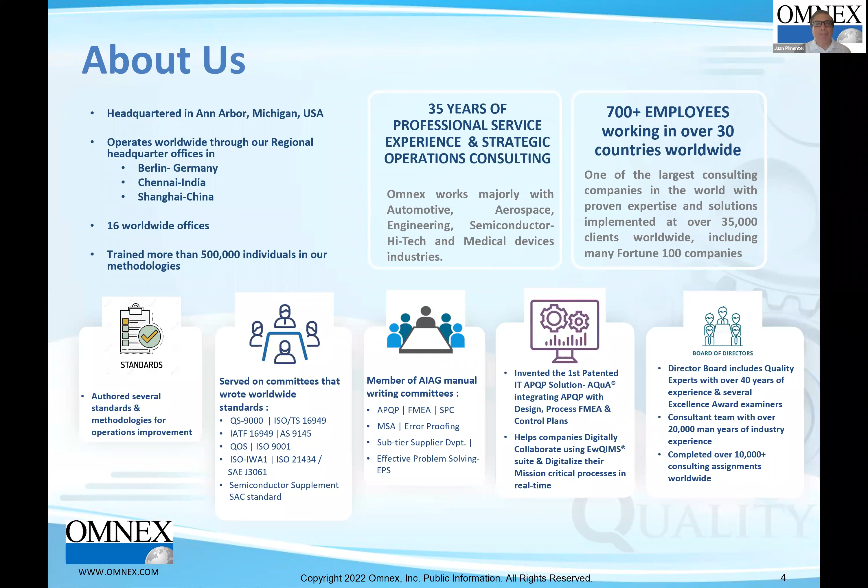Yeah, good morning. My name is Juan Pimentel, and I am pleased to offer you this seminar on a new standard that was just approved in April of this year, which is ISO 21448. You have probably seen some of these slides, which is an introduction to Omnex. So I'm not going to spend too much time on this. You will get a printed copy of this presentation that will include some of this information. As you can see here, Omnex targets several markets: automotive, aerospace, semiconductor, electric and autonomous vehicles, medical devices, and manufacturing. This webinar targets automotive.

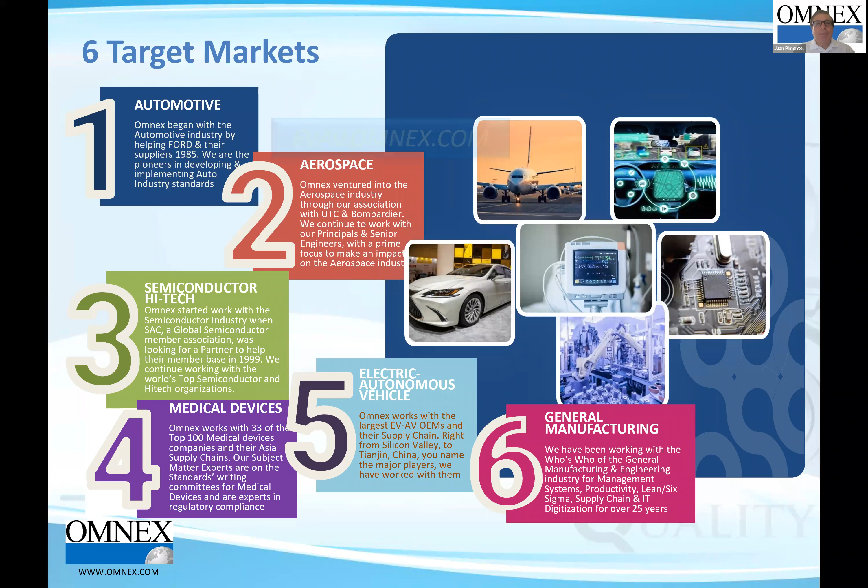A little bit about myself, as was mentioned before. I have an extensive background in functional safety as well as automotive. I used to be a professor at Kettering University in Flint, Michigan, and now I'm an international consultant.

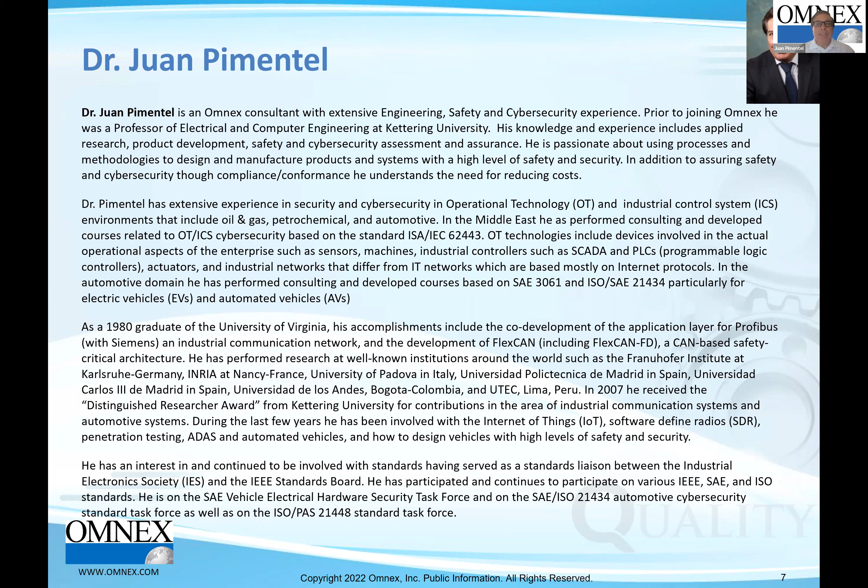This is the abstract of the webinar. Basically, what we're saying here is that NHTSA has published information about accidents, and it turns out that less than 1% of vehicle crashes are attributed to vehicle failures themselves. The rest are related to other reasons, including drivers, whether or not they're automated or manual. So this standard 21448 is very important because it promises to address the issue of these accidents.

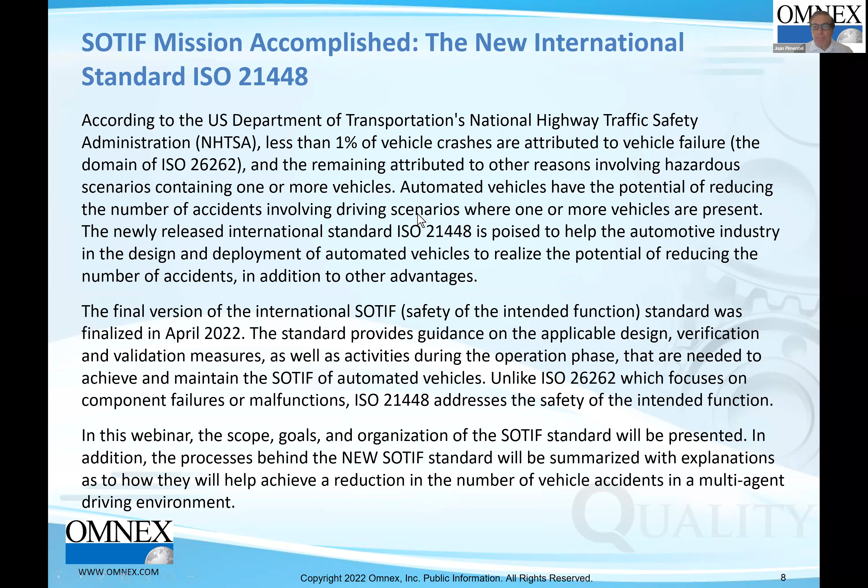So this is the contents. I will provide a brief introduction to some terminology, such as ADS, HAD, and ADAS. I will review very briefly the SAE automation levels, which is very important. And then I will move to the fundamentals of SOTIF, emphasizing the 4 areas, areas 1, 2, 3, and 4. Then I will cover an overview of the SOTIF standard and emphasize the main clauses and the annexes. At the end, I will provide an integrated implementation with SOTIF and functional safety, as well as an example, including adaptive cruise control.

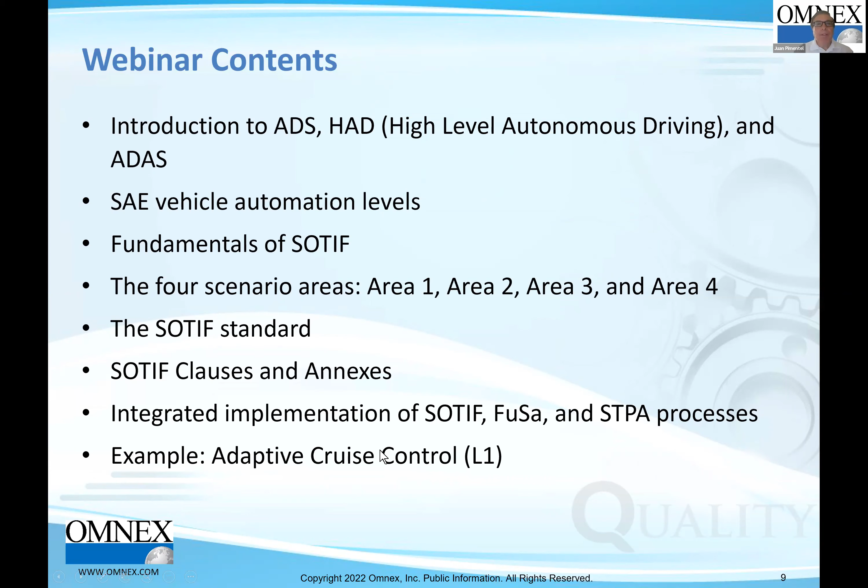All right, so there is some terminology related to autonomous driving, and there are basically 3: ADS, ADAS, and HAD. ADS is the umbrella term that includes automation levels 1, 2, 3, 4, and 5 of the SAE International Automation Level Standard. Now, as a subset of that, we have 2: HAD, which is high-level autonomous driving, covering 3, 4, and 5, and ADAS, which covers levels 1 and 2. So you could view ADS as being ADAS plus HAD.

That's one view. However, I must mention that some definitions actually say that ADS is equivalent to HAD. ADAS, however, is fairly well established, strictly 1 and 2. So you may find some definitions that are slightly different than this one. But nevertheless, in my opinion, the most important thing, whatever definition you use, is to find out what levels it covers.

Here are a few examples of ADS systems at levels 3 and 4 in this case. So examples get different names. For instance, traffic jam chauffeur systems, and mostly European terminology. In the US, it's traffic jam pilot. And likewise for the next one, motorway chauffeur system or highway pilot, urban chauffeur system or urban pilot, and automated valet parking systems, also called car park pilot.

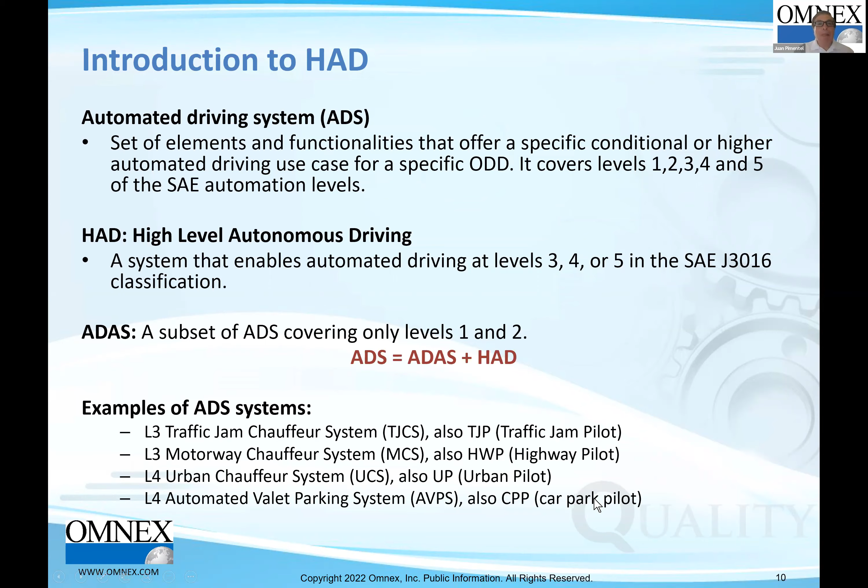So as you could see, these are automated systems for a variety of uses. For instance, traffic jam, traveling on the highway, in a city, or in a parking lot. Just as a brief background, here we're showing a lot of stuff primarily related to sensors and controllers in the car, as well as communication systems. So we're particularly concerned about environmental perception sensors because those are very critical for SOTIF.

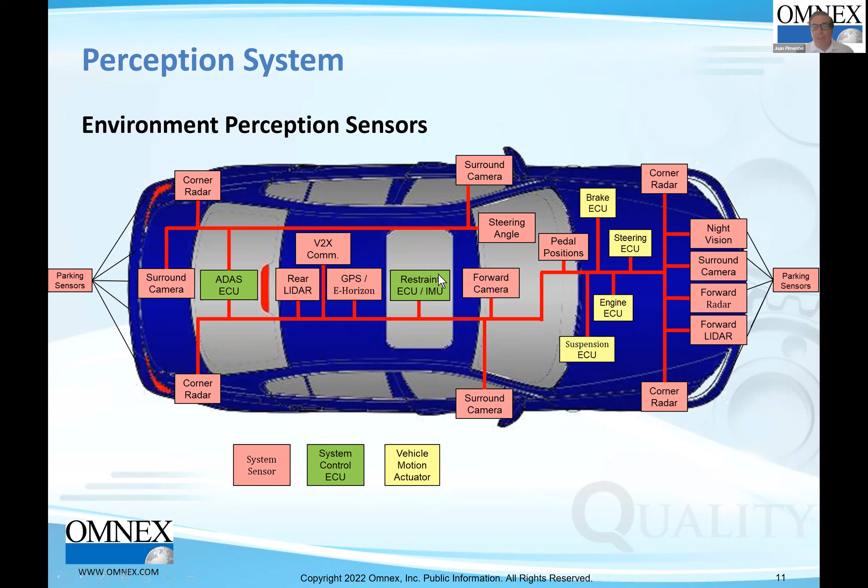And as you could see here on the right side, you have parking sensors, you have radars, you have cameras of various types, and you can also see in this diagram some controllers, which are the ECU portion. So the ECUs are controllers, and then we have some other type of information, which is called perception sensors. In yellow, we also have some motion actuators, and in green, we have the actual controllers. So this is to illustrate the type of elements, if you will, or hardware and software in a car that is directly related to ADAS and the automated systems.

Also, the standard uses a model called the Sense Plan Act model. And the idea is that the first thing that happens is that you sense the environment, through sensors, obviously. Once you have a pretty good idea about the environment, then you go into what is called planning and control. So this middle portion has to do with control functions and planning functions. Once you have that, then on the right side, you have the actuators. So this is where the controls get actually implemented in the car and make the car move in certain ways.

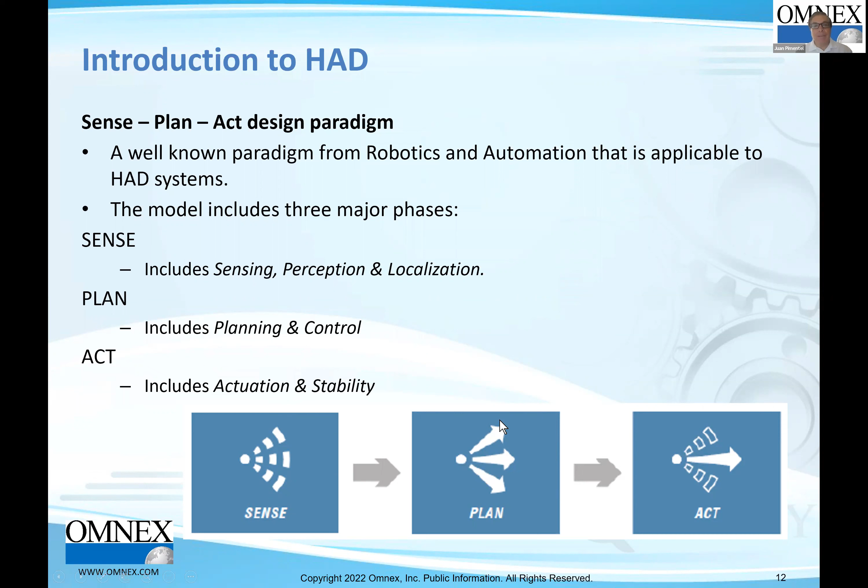Other terminology that really comes from the SAE side is the DDT, or dynamic driving task, which you could think of as really all of the activities or actions that need to happen in order to operate a vehicle. So you as a driver, whether you realize it or not, actually do all of these things. The main difference in automation is that we're going to have a computer, sometimes called robot, to perform these functions, either totally separate from the driver or in conjunction with the driver.

So the main functions, as you could see, are lateral motion, which means steering, and longitudinal, which means braking or acceleration. However, there are other activities, like monitoring the environment. Another one is to detect and also respond to objects and other events in the environment. Still another one will be enhancing conspicuity via lighting, signaling, or gesturing. In other words, you're changing the environment.

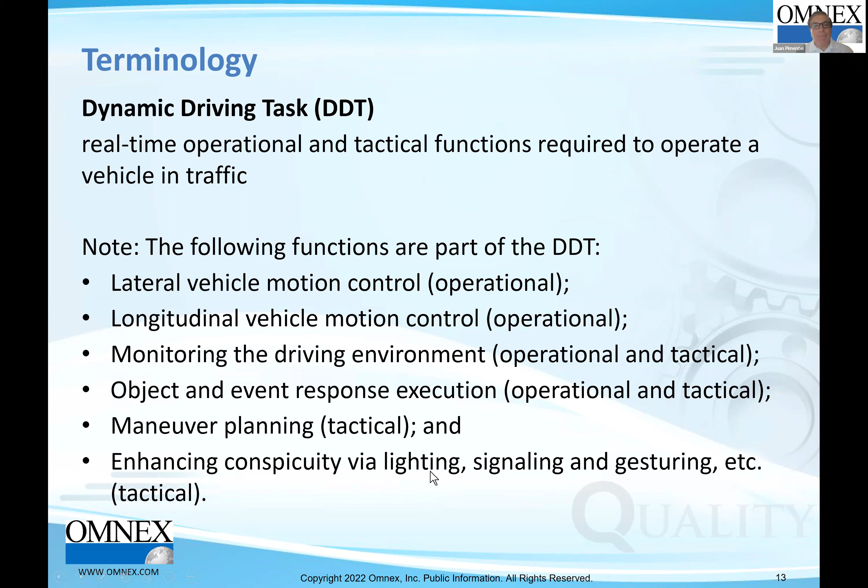Another terminology that's used very much, very important, is called ODD, Operational Design Domain. The idea is that it is really very difficult to design an automated vehicle to work in every situation, every condition. The design is going to be gradual, starting from a very simple ODD, and then expanding or extending the ODD to cover many situations. So as you could see, these are conditions under which a given driving automation system is designed to function.

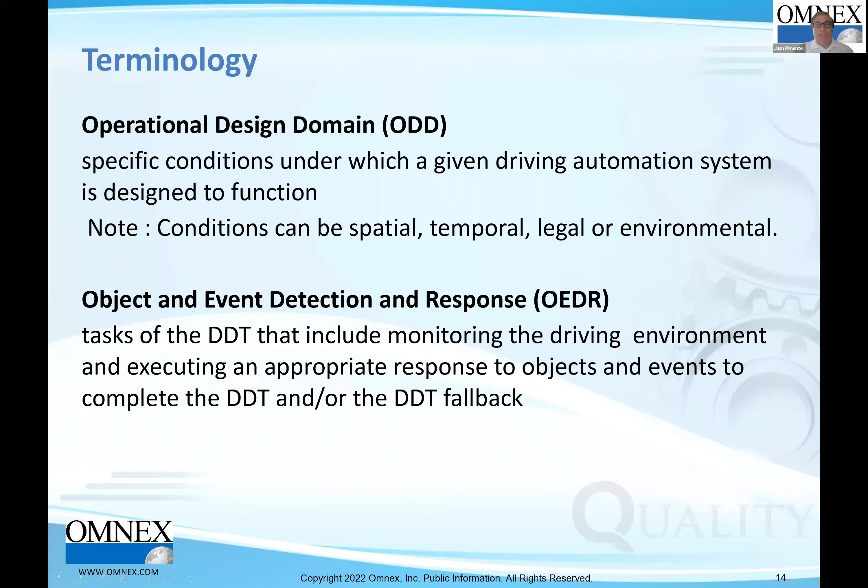The other term that I mentioned briefly earlier is OEDR, which is the Object and Event Detection and Response. So really two things here. One is the object, and the other one is the events. You need to detect them and you need to have a response to them. All of this will be useful actually when we talk about the classification of the automation levels.

This is a diagram that shows hierarchically how all of these terms are combined. The DDT, again, determines the conditions under which the system works. And as you could see, the OEDR is very active here because the OEDR is about detecting objects and also detecting events. And then the R stands for response, which means that you have to do something. And the things that you can do, as you could see here, are lateral vehicle motion control and longitudinal, and also the very basic motion control of the car itself. This translates basically into steering, braking, or accelerating the car.

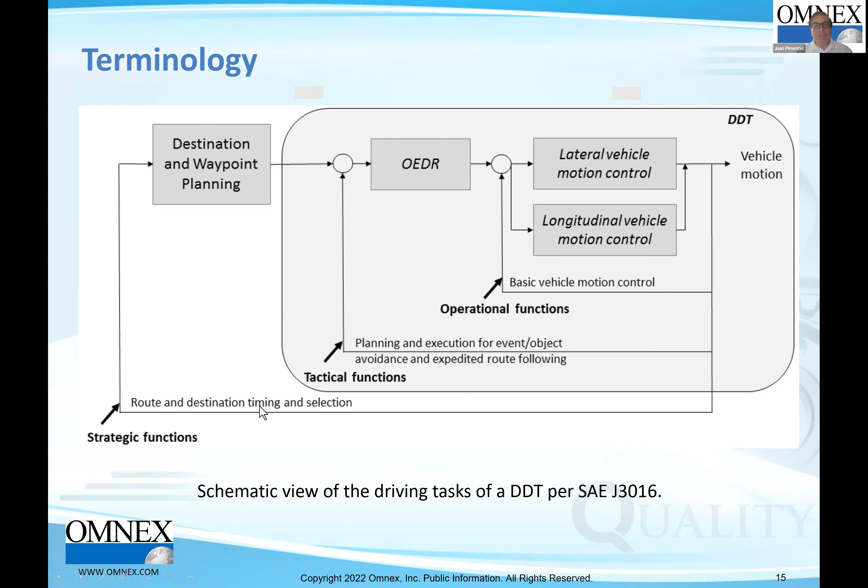Secondly, this diagram introduces three particular types of functions: operational functions in the inner section, the tactical functions in the middle, and then you have the strategic functions. And by the way, this document, SAE J3016, only deals with the operational and tactical, not the strategic. However, SOTIF deals with the whole thing.

This diagram explains the automation levels that I talked about before. There are 6 of them altogether, including no automation. So no automation means the old days, maybe 30, 40, 50 years ago, where the driver did everything, of course. And then you have level 1 and 2, where the driver, as you could see, plays a significant role.

And then 3, 4, and 5, where the human driver plays a less significant role. So there is a big difference between levels 1 and 2 as compared to 3, 4, and 5, okay? Because 1 and 2 is basically ADAS that we talked about, and 3, 4, and 5 are high levels of automation. And very important, a lot of people get confused, especially in the middle portion.

So the left one here is steering and acceleration, which means who does that? In the middle is monitoring the environment at all times, okay? And then the fallback, which means that when the automation fails, who takes over the system?

Let's take a good example, for instance, at level 2 and 3, because these two are very confusing to a lot of people. For example, it is well known that Tesla is a level 2 system. And this is why if you read or know a lot about Tesla, you will see that the driver here in the middle is responsible for monitoring the environment, okay?

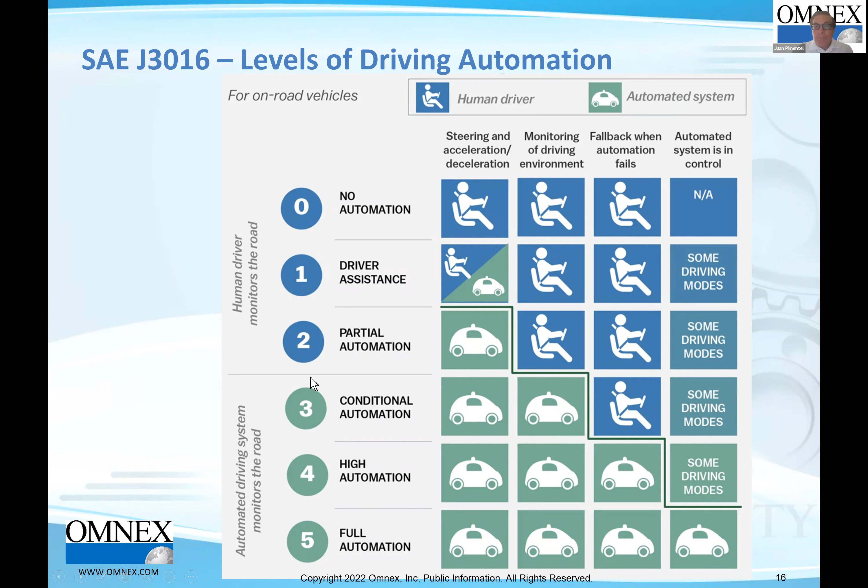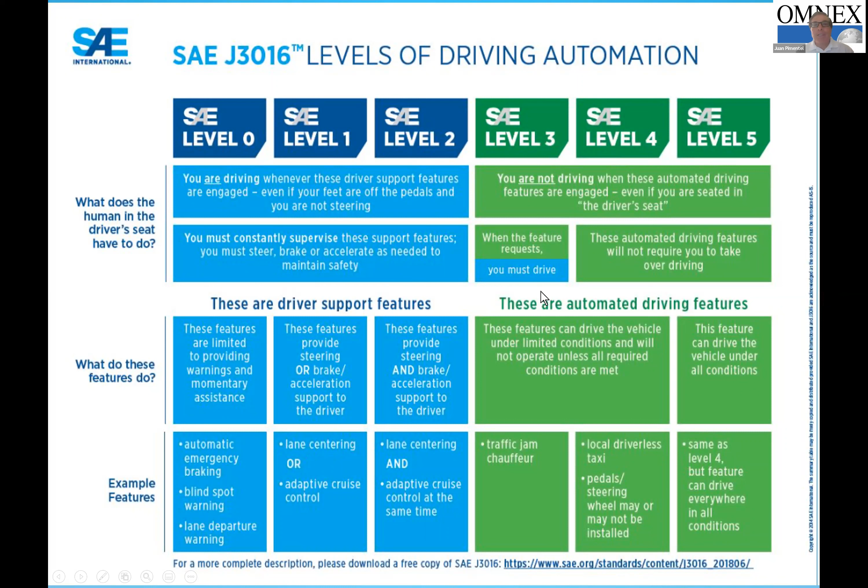And this is another diagram from a different context to illustrate the prior diagram, emphasizing the role of the human on the top, and at the bottom, what the main responsibilities are. So these are different views of the same automation levels that we talked about earlier. I'm not going to spend too much time on this one because this is complementary information.

Okay, so let's move to the actual SOTIF, and I'm going to start off with the fundamentals and then move to the standard itself, okay? Sorry about that, I think I went backwards. SOTIF, first of all, stands for the safety of the intended functionality. And sometimes there's a confusion between this standard and a prior standard also about safety, which is 26262, called the functional safety standard.

And the reason for the confusion is that both standards use the term function or functional a lot. However, the main difference is that 26262, functional safety, has to do with hazards due to malfunctioning behavior of EE systems. EE means electronic and electrical, by the way.

Another way to explain this is that, as you know, cars today have a lot of electronics, a lot of technology, brought in for many reasons. I'm not going to go into that, but you must accept the fact that it's a very sophisticated system and has a lot of electrical, electronic, hardware, software, sensors, you name it, right?

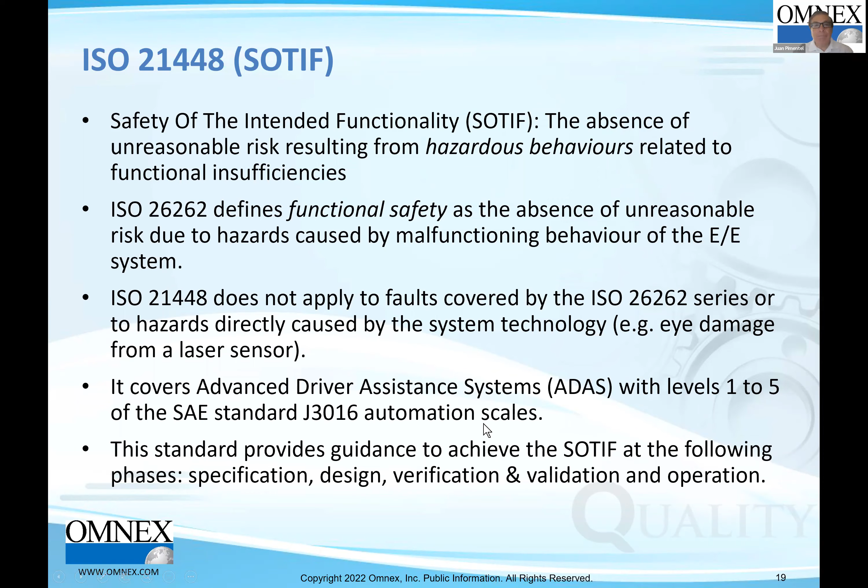So first of all, you have a triggering condition that will trigger a hazardous behavior, and that results in a hazard. So you have the hazard due to SOTIF type of causes that I mentioned before, functional insufficiencies. But in this case, you need a triggering condition to trigger all of that. The triggering condition works together with the scenario containing those conditions in which the hazard can lead to a harm. I will give you some examples later on because these concepts are sometimes a little bit abstract. I'm talking about triggering conditions versus functional insufficiencies.

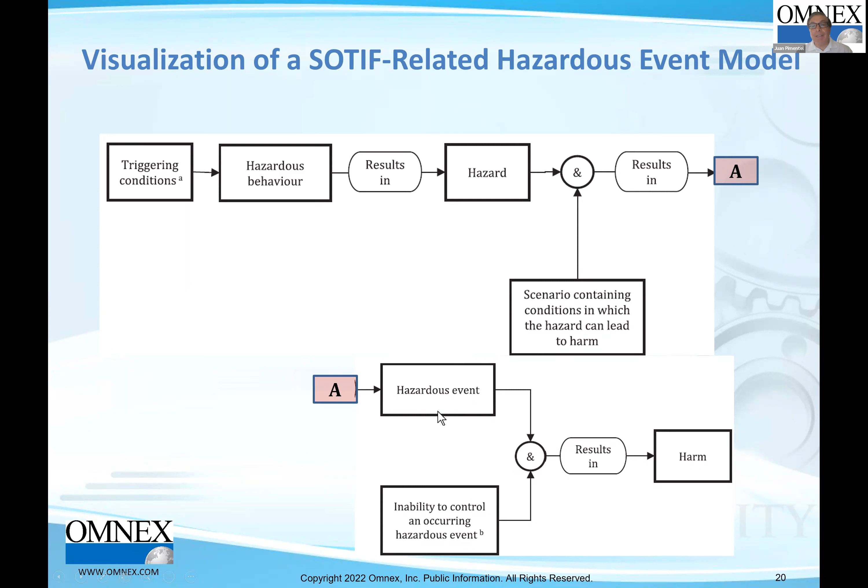Okay, but basically after this, you have a hazardous event. So the hazardous event is a very specific situation where harm could happen. And it's all related to the inability to control this hazardous event. So you have people involved here, or the driving mechanism could be automated, or people that have the last say as to whether or not it will result in a harm, okay? So for instance, if you have a very good driver that will avoid an accident, then this is what we're talking about here. Or if you have an automation system that works very poorly, it will not be able to contain this event, and then that will result in an accident or harm. So this is called the hazardous event model for SOTIF, okay?

As you saw, there are several blocks, several stages that will guide the activities of this standard. And some of the activities are stated here. We're talking about system specification, where we specify the function. Also, we have some design activities that are related to the so-called use cases. Think of use cases as examples where the automation system behaves or works. And also, this will include many scenarios. As you could imagine, scenarios play a very important role in automation, okay? And we'll talk about that.

Scenarios are a very important component of the standard, and also a very difficult subject. These scenarios then contain these triggering conditions that I talked about earlier that could lead to harm, okay? However, an important consideration here is the situational awareness. This is where the driver may come in and try to avoid the event leading to a harm, to an accident, okay?

Over the vehicle's operational life, which may take place over many years, maybe 15 years, the following can vary or happen. The environment may change, and also the proper reaction could change. For instance, there are different traffic signs that are introduced. So there's a lot of changes even in the operational life cycle that take place that also needs to be taken into account.

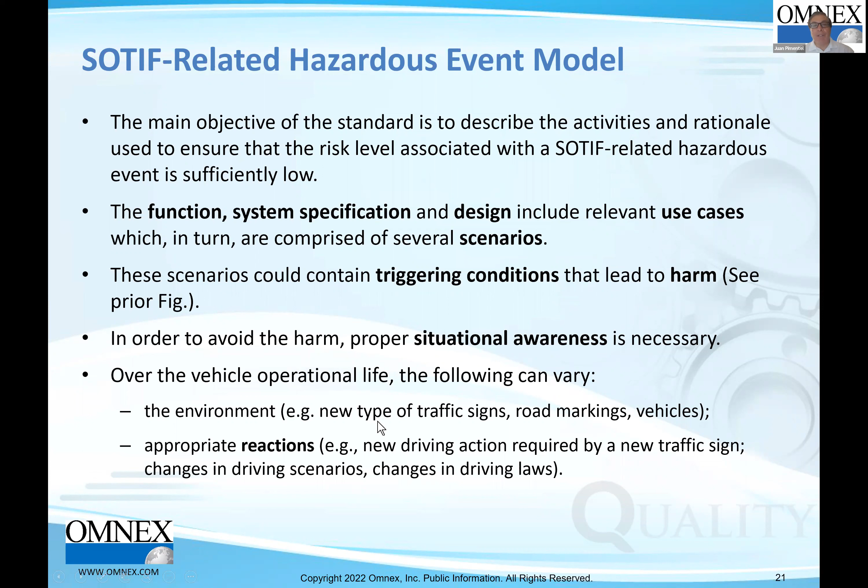This is a comparison between functional safety and SOTIF. The next diagram will show the SOTIF counterpart, but we're talking about the sequence of events here leading to a failure, leading to a hazardous behavior, a hazardous event, and to harm. Again, in functional safety, as I mentioned before, it has to do with systematic faults or random hardware faults. In other words, something fails - for instance, a sensor fails, a computer fails. Functional safety deals with this type of behavior as it relates to safety of the occupants.

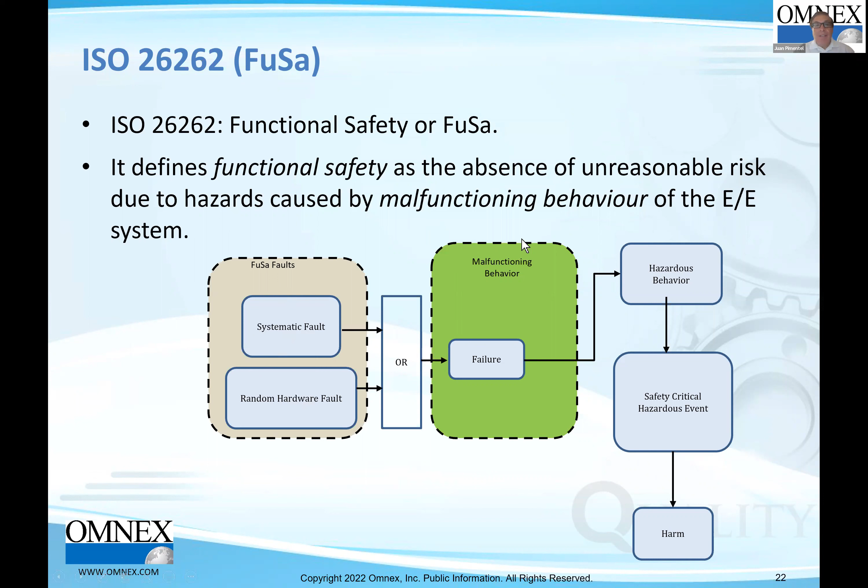Again, SOTIF is the complement of that. We're still talking about unintended behavior, hazardous behavior, and harm, except that the root causes are different. Now we're talking about functional insufficiencies, shown here as being of two types: performance related or specification related. However, there is another third cause, which could be a mistake from people, called reasonably foreseeable misuse from the driver or people involved in the driving automation. So this diagram and the prior one try to illustrate the main differences between functional safety and SOTIF as it relates to the hazards.

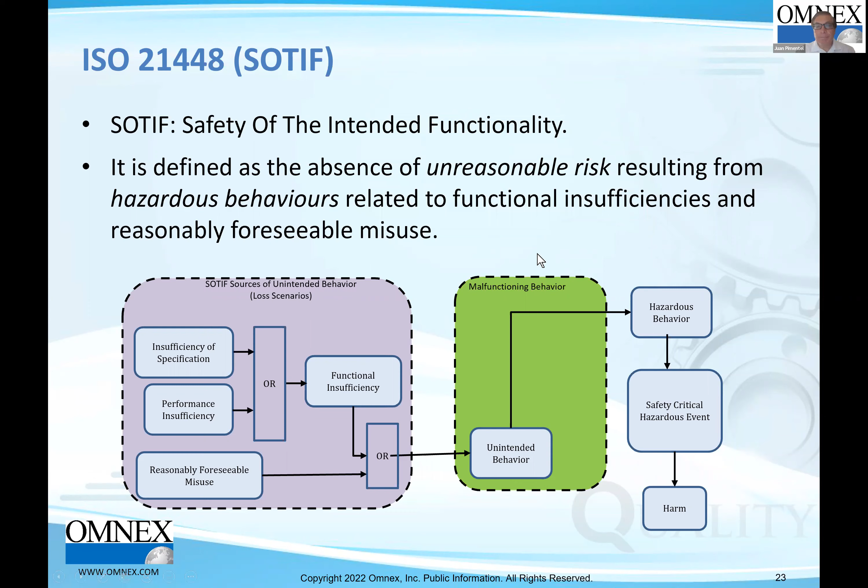Now let's move on to some terminology used by the SOTIF standard: scenario, scene, and use cases. Scene tries to depict the elements in the driving environment, which is fixed or dynamic. Fixed meaning, for instance, infrastructure, bridges, and stuff like that. Dynamic would be other cars, other vehicles, people, bicycles, whatever. So the whole thing is called a scene, which is a snapshot of all of this.

Now, scenario tries to model that on a time basis, including some action events, goals, and values. So the scenario is a bit more sophisticated term that includes the scene, and it depicts a sequence of events in time, whereas the scene is a snapshot at one point in time. That would be the main difference between the scene and the scenario.

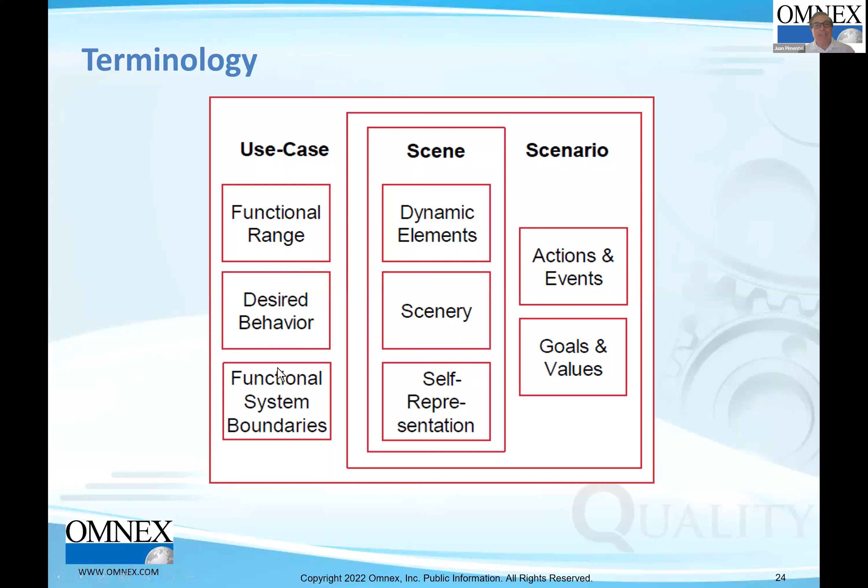And use cases include many scenarios, of course, and include additional information about how the automation system is used particularly. So you have things like functional ranges, the desired behavior, the boundaries of the system. That is called the use case.

SOTIF is based on a definition of scenarios. So scenarios are classified into 4 areas. This is a major thing about the standard. The classification has to do with the fact that scenarios could be hazardous or not hazardous. Another way of classifying scenarios is in terms of whether or not they're known scenarios or unknown scenarios. Unknown scenarios are important for SOTIF because this causes a lot of problems just because they're unknown. If you combine those 2 ways of classifying, you end up with 4 areas called area 1, 2, 3, and 4.

Of these, the most critical areas are 2 and 3 for safety. 1 and 4 are not so critical because they're not hazardous. So safety has to do with hazardous scenarios. One of the objectives of this standard is to do analysis, design, and verification with the goal of moving the vertical line to the left and the horizontal line to the bottom. The reason is that you're trying to minimize the hazardous areas, particularly area 3. Actually you minimize 2 and 3, but 3 is very critical because it's something you don't know about - something a car company releases in a product without realizing there are issues with the design, and only when the car is being driven do those issues come up. So they're unknown.

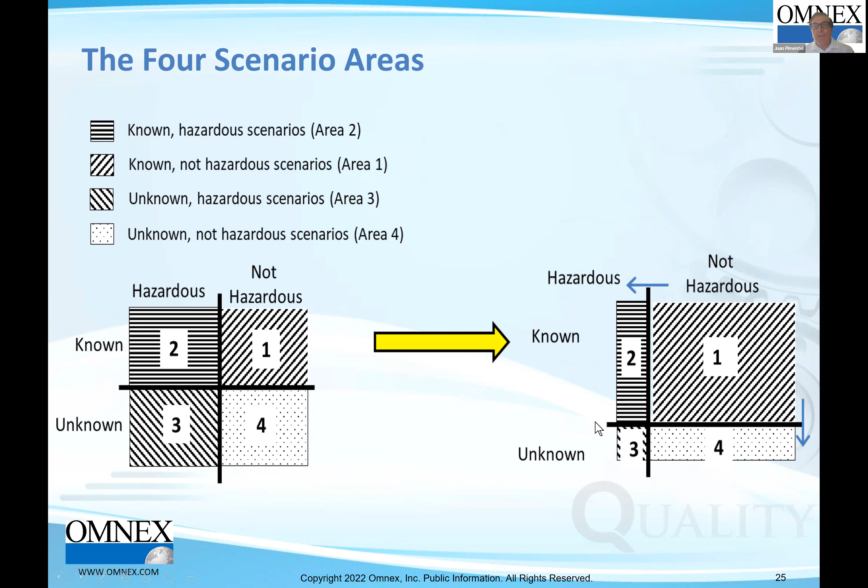Okay, let's move to the standard itself. The approach is that the standard consists of many processes and methods that are identified very clearly in order to do a bunch of things. Number 1 is to do what is called specification of the system and the design of the system. And all of that is in clause 5.

Now, you may wonder whether or not this design is complete here, and it's not. Because this standard is iterative. In other words, we will go back and review this in several phases, okay?

So clause 5 is about specification and design. Clause 6 is about the identification and evaluation of these hazards that we talked about. Okay, so this is a very important component. 7 is about functional insufficiencies and triggering conditions that I mentioned are critical for SOTIF.

And then in 8, we talked about the necessary changes. So this is the design portion. In 8, you make design changes to the design that you started off in clause 5 in order to address the SOTIF related risks. So this standard is very much risk oriented. I'm talking about safety risks, obviously.

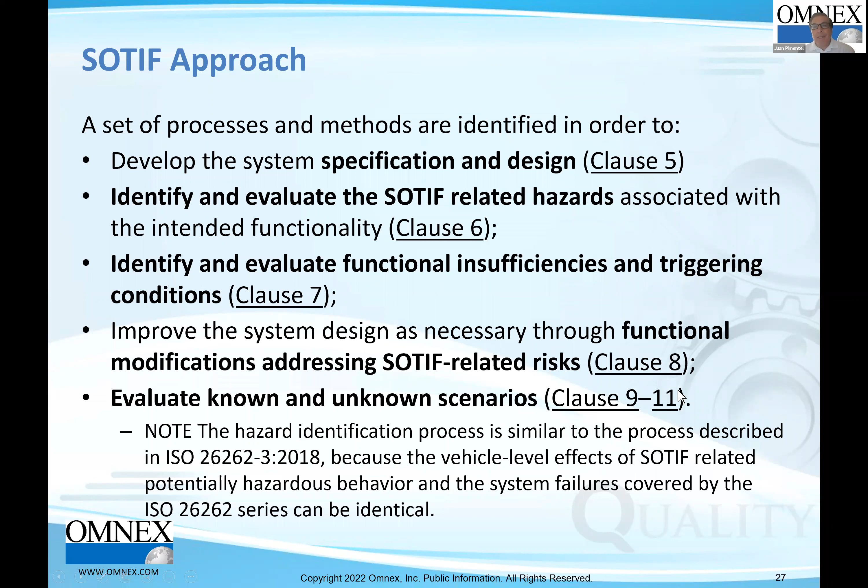So again, this is a listing of the clauses. There are 13 all together. 5 to 13 are called normative, and the others are informative. And most diagrams only depict the normative clauses. And here's the list.

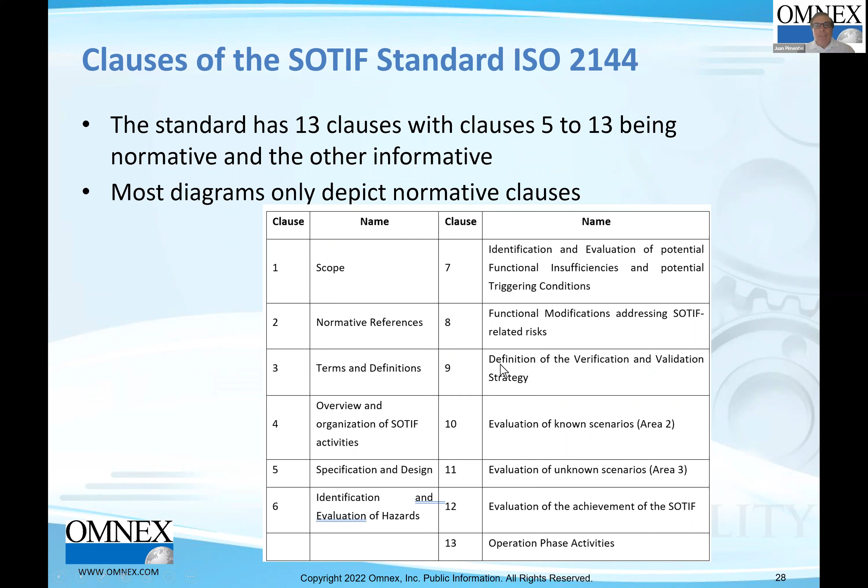And then, of course, the operation phase activities. This is when the vehicle is in the user's hands. There could still be some issues dealing with SOTIF that they talk about. But primarily, I would say that the most important clauses are 5 through 12.

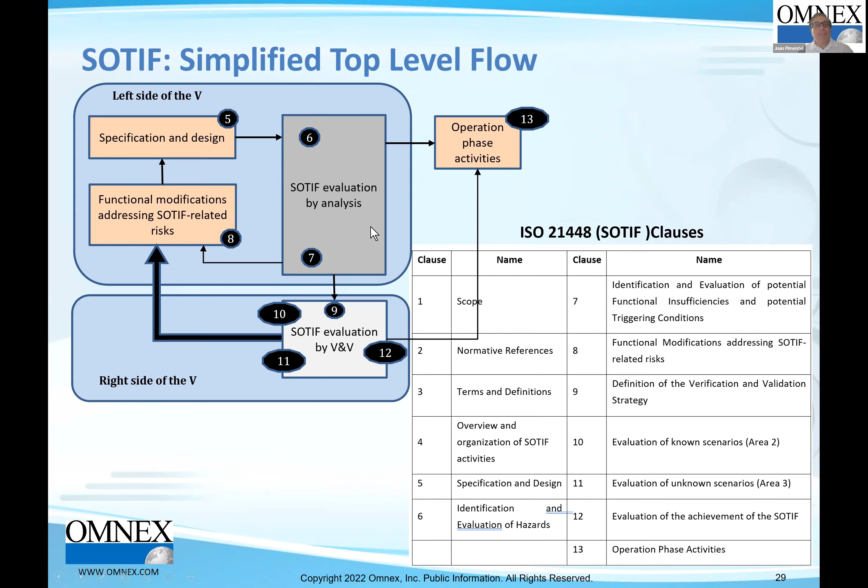This is a detail of the standard in terms of the left side of the V, okay? As you could see here, we have clauses 5, 6, 7, and 8. And this is an iteration, it's iterative. So you iterate on this portion on the left side of the V.

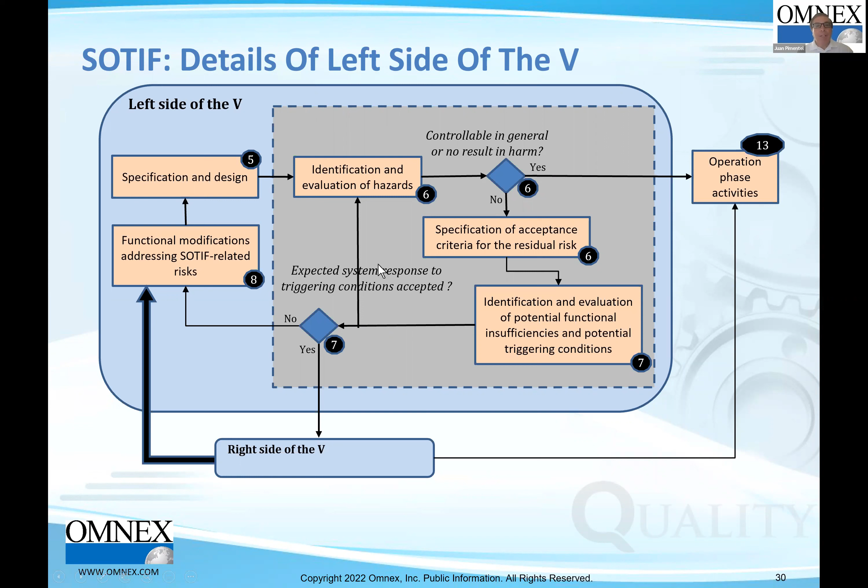And then right here on the bottom is the iteration on the right side of the V, meaning when you deal with testing, verification, and validation, you still iterate, even going back to 8 and 5. 8 where you modify the design, and 5 is the actual design. Until, obviously, there are 2 checks here where you can exit and be finished with it. One from the left side of the V, in an iterative portion, of course, and another one from 12 where you're finished. So these are simplified diagrams.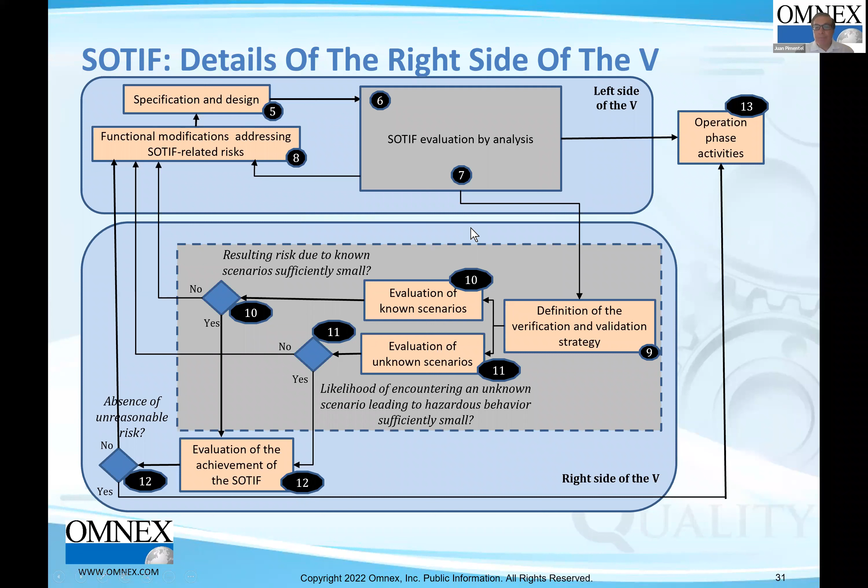This one is a bit more involved. This is from the actual standard, okay, that puts together the whole thing that I was talking about earlier. So this is a complete diagram from the standard itself.

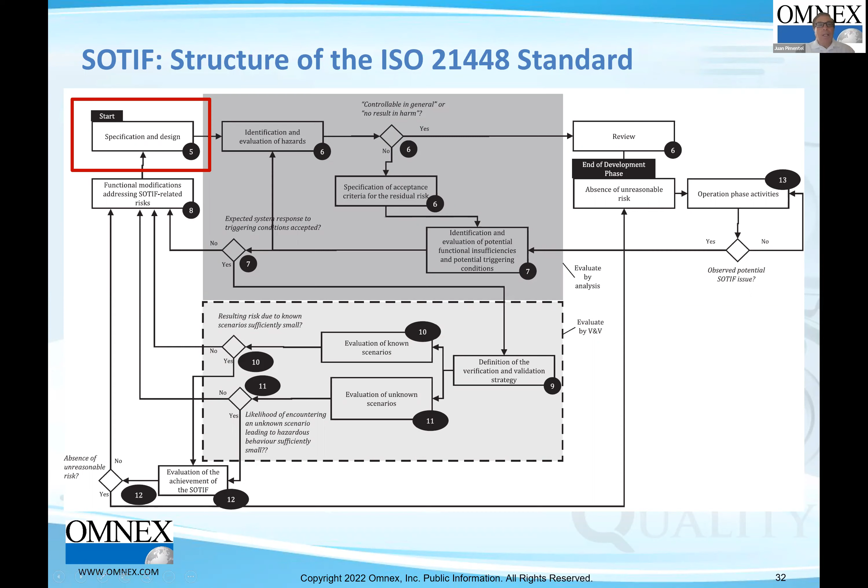All right, the standard also has 4 annexes, A, B, C, and D. And I would say that these annexes are very, very important in that they give you additional information and also some design methods, some more detailed examples about a bunch of stuff in the standard.

So Annex A is called general guidance. A1 has to do with the argumentation for the safety case. A2 has to do with general explanations and interactions between this standard and 26262, which I mentioned are complementary. And A3 has a few examples, more detailed examples. As you could see, you have highway co-pilot, robot taxi, and a few other ones.

In this webinar, I will go over very quickly the first example, the adaptive cruise control. Annex B talks about scenarios. I mentioned the scenarios are very critical. So this is where they detail scenarios and how to do the analysis based on scenarios.

There are several methods used for identifying misuse scenarios, for instance, or for construction of scenario factors, and analysis methods for SOTIF, adaptation of several analysis methods. The last one is about the use of a methodology called STPA for SOTIF.

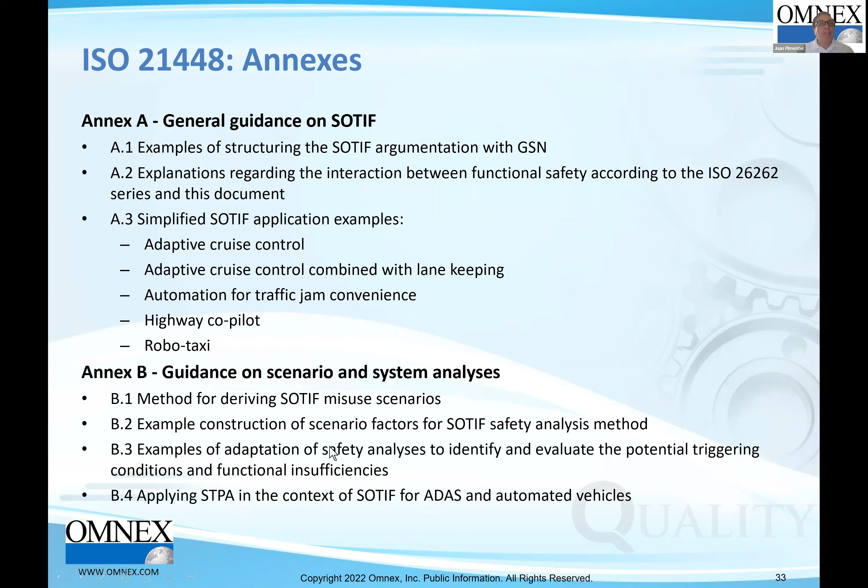Annex C has to do with verification and validation. This is guidance on how to do the right side of the V, if you will. It talks about the strategy, validation targets, and also how to do the validation of particularly area 3, the unknown, which is a big issue for SOTIF. It gives additional guidance on this.

Parameterization of scenarios and sampling all have to do with the fact that, potentially, the number of scenarios in SOTIF could be millions and billions or infinite. Therefore, you need to be very careful as to what techniques and methods you use to do all of this, because it would take too much time to do verification validation of a huge number of scenarios. So the idea is to do enough verification validation only of those scenarios that are significant for safety. Another name for that, by the way, is called safety guided verification and validation, or safety guided design.

The last annex, Annex D, is guidance on specific aspects of SOTIF which are critical. For instance, driving policy, which means just how to drive a vehicle, basically. D2 has to do with AI, artificial intelligence, and machine learning.

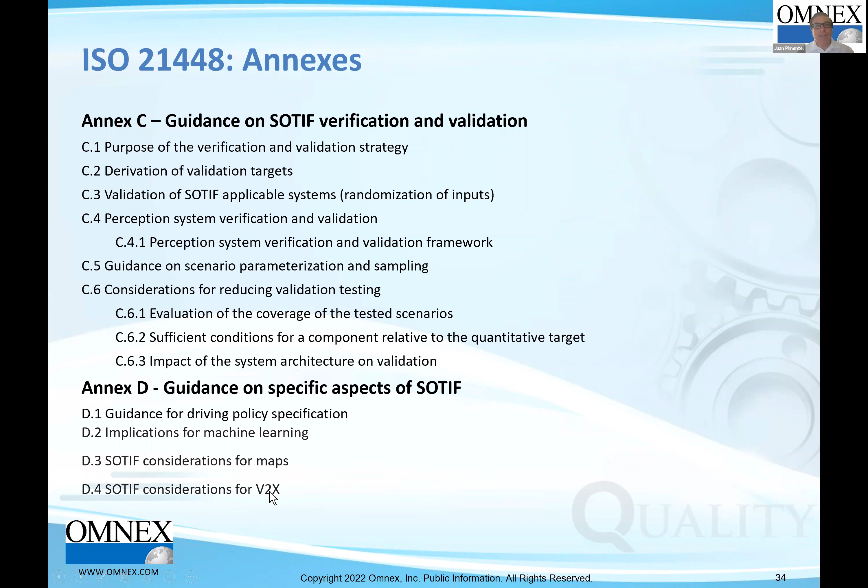In the next few slides, I'm going to go over some significant sections of the standard, at least going over the main purpose of these particular clauses. We don't have time to actually go into a lot of details of the clauses, so we'll restrict the discussion to the main objectives.

Here are the objectives of clause 5, which is specification and design, which is basically to collect enough information sufficient to initiate the SOTIF related activities. That's goal 1 or objective 1. The second one is that this information needs to be updated because it will change by the time you perform the other clauses. These are the specific objectives of this particular clause.

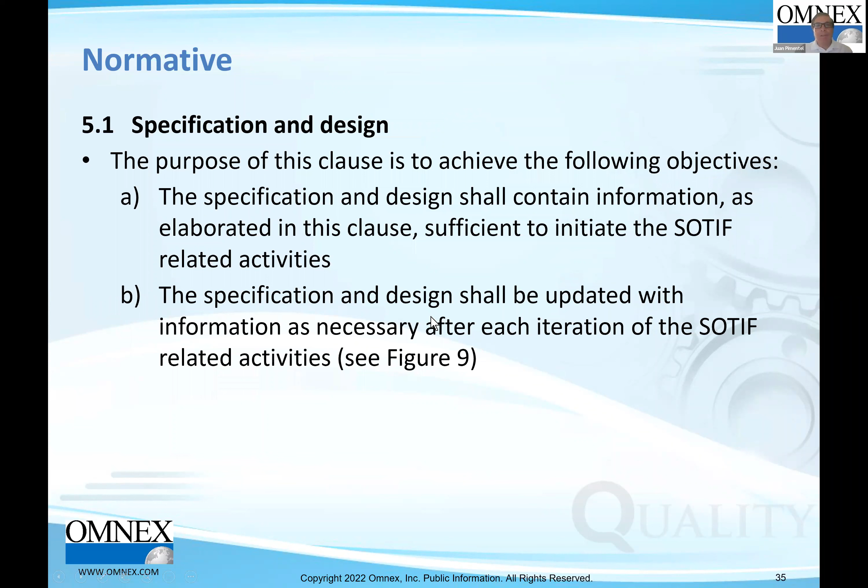6.1 has to do with the identification and evaluation of the hazards. This is important. The main things are: A, they need to be identified systematically. B, you need to evaluate the risk of these hazardous behaviors, because that evaluation will enable you to know whether or not you are finished with the design process. And C, you need to define the so-called acceptance criteria of the residual risk. This is how you will know whether or not you are finished, or if the risk is acceptable.

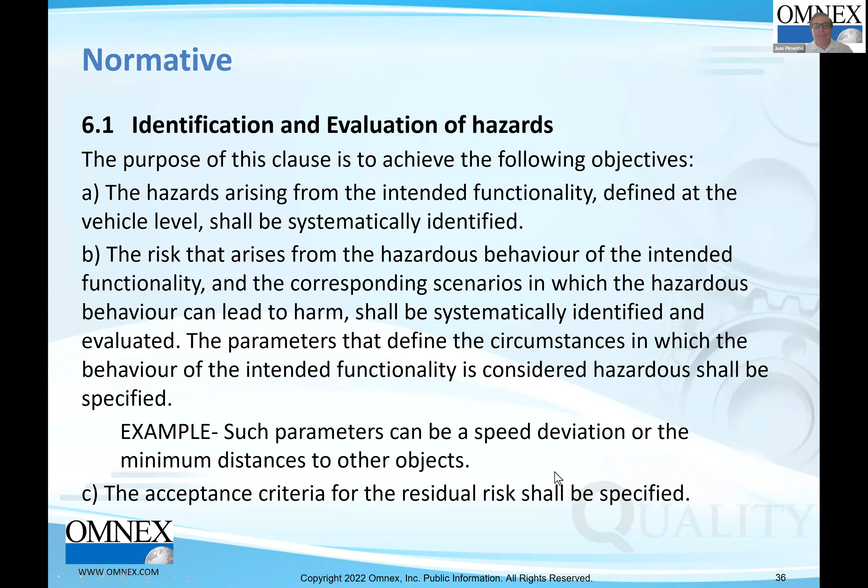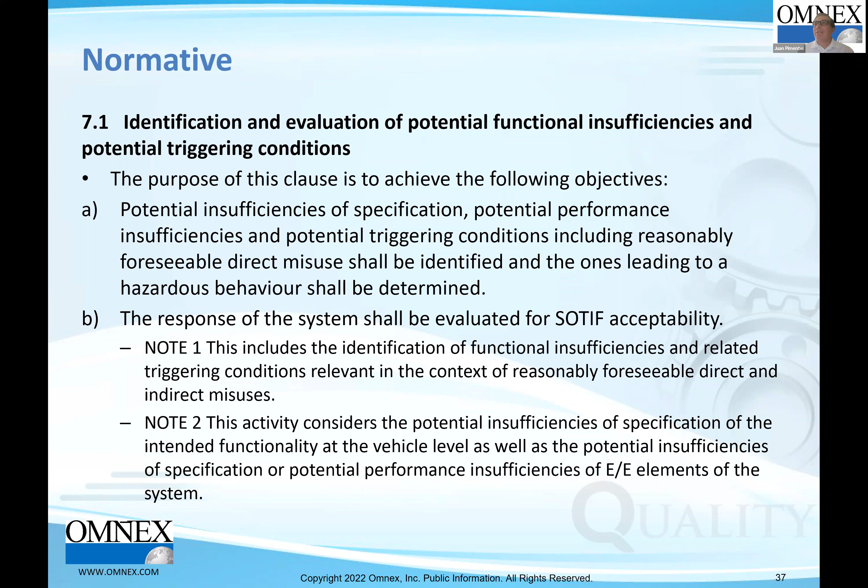Clause 7 has to do with the identification and evaluation of potential functional insufficiencies and triggering conditions. We have two main objectives here. Objective A is that you need to identify these insufficiencies of specification and performance insufficiencies leading to hazardous behavior, as in the model we talked about before. This is much easier said than done, because you need a very high level of detail in terms of the technologies used. And objective B is that the response of the system shall be evaluated in terms of the SOTIF acceptability. Both of these objectives are challenging.

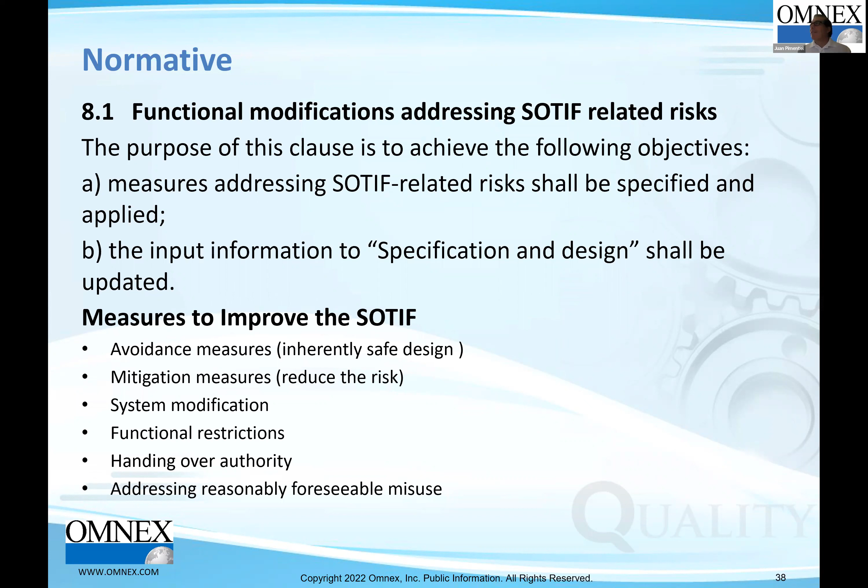Clause 9 has to do with the definition of a strategy for verification and validation. Here is where you specify things like necessary evaluation of the potentially hazardous scenarios, coverage of the scenarios, the evidence that you need to provide for testing and verification validation, and also the procedures to generate the evidence. The second point about this objective is that the rationale for this suitability needs to be provided. Rationale is a very thorough explanation of why you're doing things the way you're doing it.

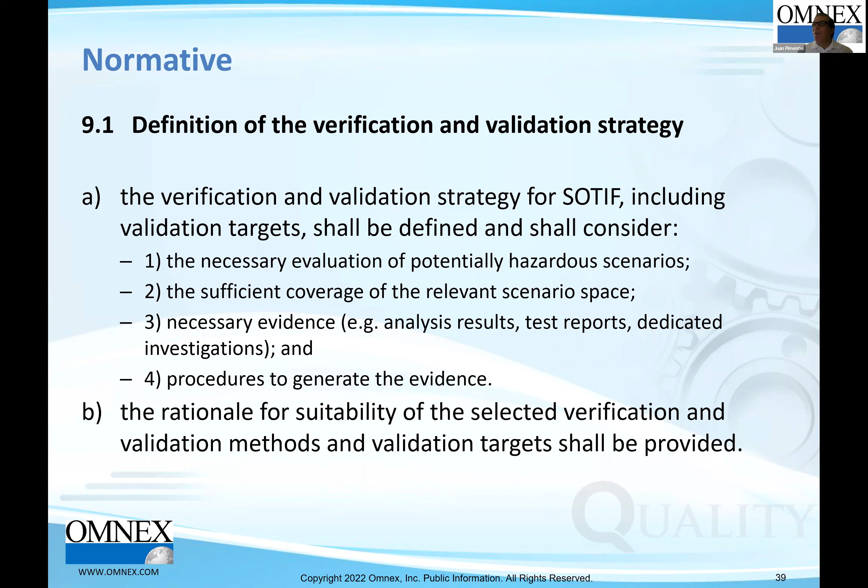Here you have some list of methods that the standard suggests on the right side of the V, and they're in tables. There's not enough time, but I simplified tables 6, 7, 8, 9, 10, and 11, which is quite long, in the context of the activities on the right side of the V. So for 9, which has to do with the strategy, you have a table with techniques to do that. For 10, known scenarios, it has the most, because they're known, we know a lot about the sensors, the planning and control, the actuation, and the integration. For each of these, you have tables with many methods for you to use.

And 11 is for the unknown. Being unknown, this is quite a long list. Each of these tables has at least maybe 10 to 15 to 20 methods. So if you add them up, you're talking about close to 100 different methods that you need to consider. The standard doesn't force you to use all of those, but you need to analyze each one and determine which is best for your design.

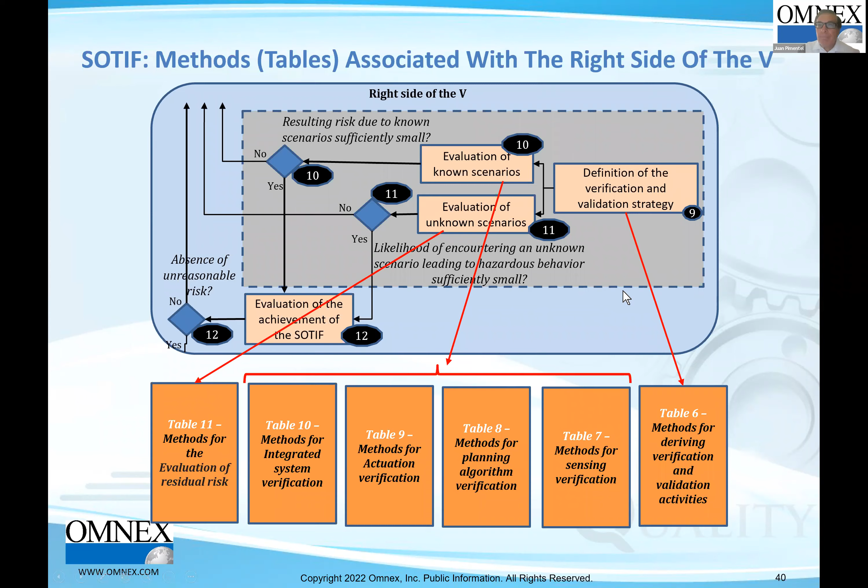Clause 10 has to do with known scenarios. Again, this is something that you know about. This is another diagram of that scenarios in a different perspective, showing the objectives of this clause in terms of known scenarios. For instance, A says that the hazardous scenarios need to be evaluated to determine whether or not they're true hazards. B has to do with the functionality of the system, which shall behave as specified for known scenarios and for reasonably foreseeable misuse. So you have a detailed list of activities that together have to do with evaluating, in a very thorough fashion, all of the known scenarios.

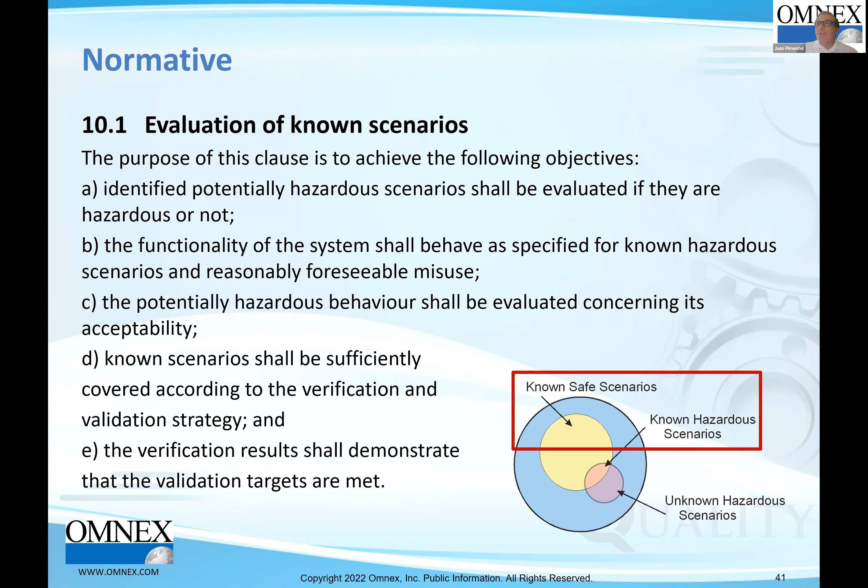The next one is the same thing, except it's unknown scenarios. This one's a bit more challenging, only because it's unknown. There are different techniques that you use for unknown scenarios. One of them, for instance, is random variation of parameters in simulation or in actual testing, with the idea that these random values of parameters will hopefully lead you to unknown scenarios, because by definition they're unknown. You run into it by doing a lot of testing in various conditions and situations.

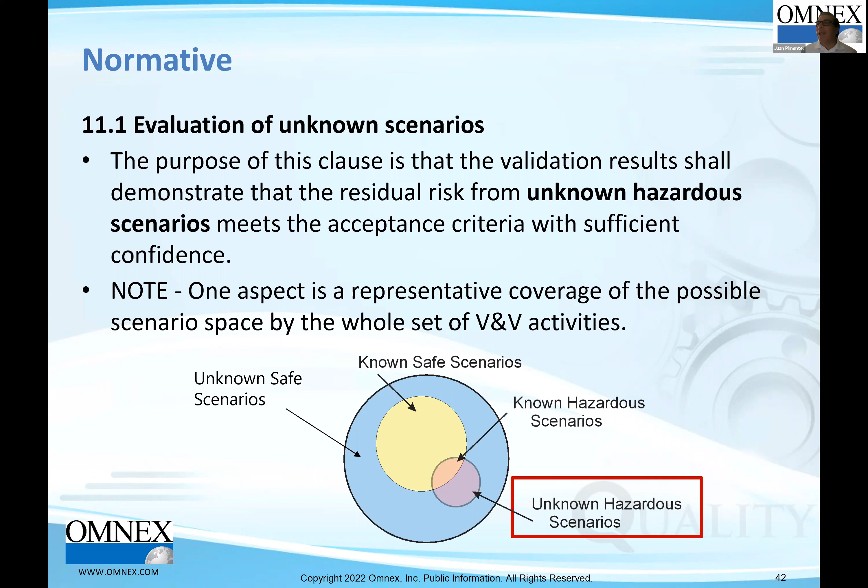The next few slides talk about alignment with 26262, and also the example that I mentioned before. The stuff in gray here is the functional safety 26262 activities in that standard, and the stuff in black, which I complemented with the actual names, are the clauses we talked about in this standard. As you can see, the left side of the V are clauses 5, 6, 7, and 8, and they're aligned to various portions of the functional safety standard. For instance, item definition is totally aligned with 5, and the design is aligned with 8.

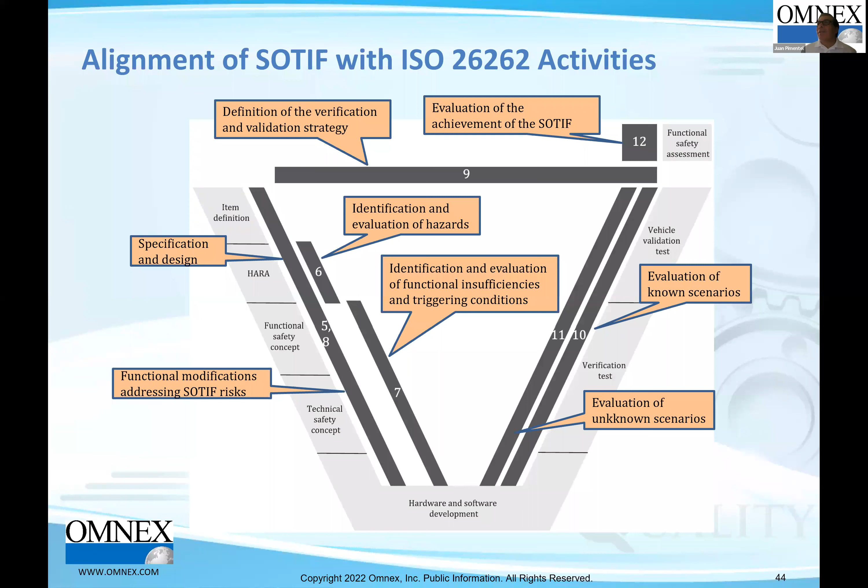And then all of that together, because it's iterative, that's why it's shown like this. However, 6 is the identification of hazard, which is clearly aligned with the HARA, the similar activity in functional safety. Likewise, 7 is totally aligned with two portions of the functional safety standard. So some alignment is more accurate, like 6 and 7, while others are not so accurate, like 5 and 8, because they're aligned with fewer activities in functional safety. Likewise, on the right side, 10 and 11, and a little bit of 9, are aligned with activities in functional safety. For this reason, a lot of people are interested in doing an integrated implementation of SOTIF and functional safety. Let's move to the example.

I chose this example, which is fairly simple, level 1. By the way, if you buy a new car, new cars today, I wouldn't say all of them, but most of them, I would say, have adaptive cruise control. Okay, so the idea is that this function enhances the standard cruise control using sensors to detect a lead vehicle. So the lead vehicle here is C2. And if the lead vehicle is getting too close, then the ego vehicle, which is C1, will take action by slowing the vehicle to match the speed of the lead vehicle automatically. Sometimes this is also called intelligent cruise control.

So you need sensors to detect this distance. So here are a few examples in terms of what we talked about. The DDT is called the lateral and longitudinal vehicle motion control. Okay, whenever you are having a driver and the system as shown here, typically using a single lane. So really, you're talking about detecting the lead vehicle. The OEDR is the driver, who is responsible for the detection and the driving because it's a level 1 system. The fallback again is to the driver because it's a level 1.

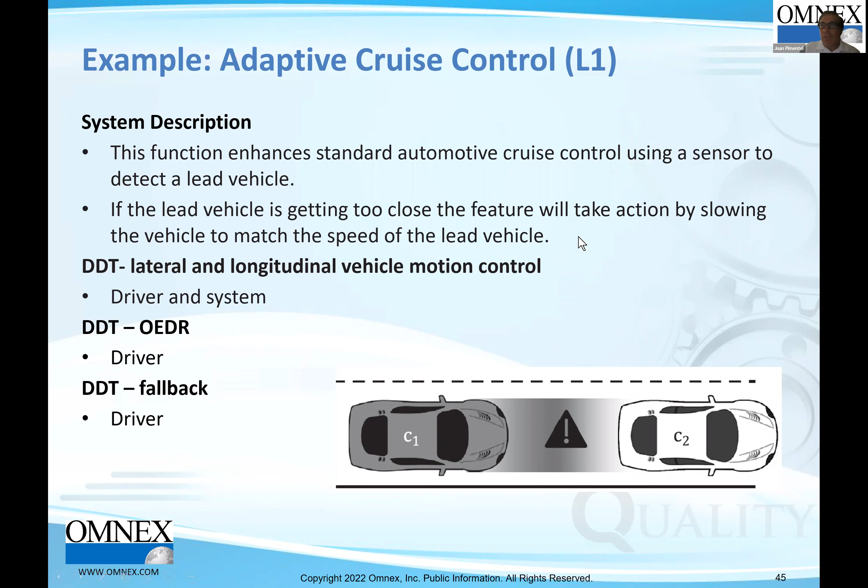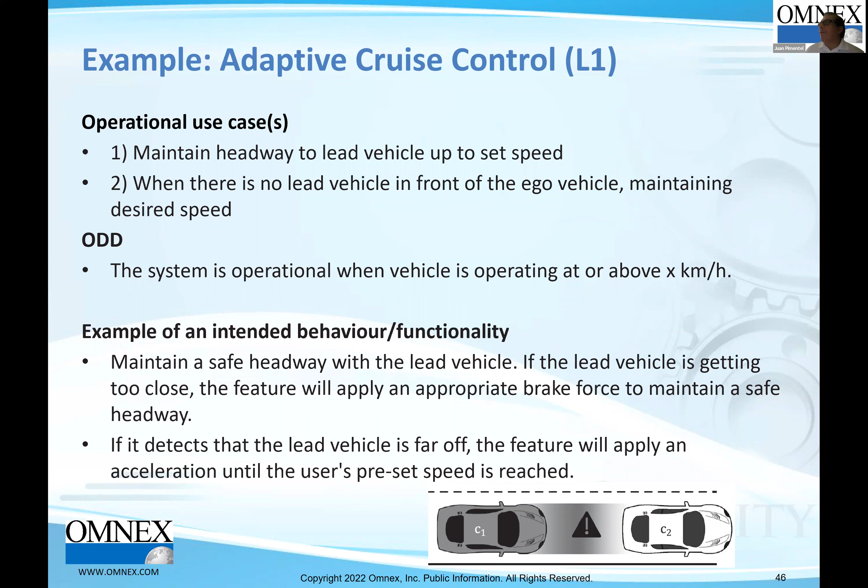In terms of the ODD, the system is operational when the vehicle is operating at or above a certain speed, so there are limitations on the lower side, and obviously, which is not shown here, also on the upper side. And here are examples of the behaviors for each of the use cases. So the intended behavior is that the system will maintain a safe headway with the lead vehicle. If the lead vehicle is getting too close, the feature, that means the design, will apply the brake to maintain this safe headway. This headway will be the difference between the vehicle C1 and C2. Now, if the lead vehicle is not there or too far away, then the feature will apply acceleration to go to a predefined set speed. So this is the operation of the system.

An example of the mitigation that you need to do to avoid this hazard would be that you need to test and design the algorithms, the hardware and software. In this case, it only talks about the software algorithm. It's enhanced to differentiate between vehicles and road infrastructure. You may think that this is easy, and obviously for human beings, this is easy. But for driving automation it is very difficult.

Let me just remind you, for instance, that Tesla a few years back misidentified a huge truck as glare from the sun, if you will. In other words, it didn't detect anything because it thought it was glare from the sun. And a driver who was killed drove directly into the truck that was crossing a highway, a high-speed road, actually, in Florida. This happened a few years back. So this is obvious for human beings, but the thing is that when you're talking about doing this automatically, it's not so obvious. It's extremely challenging.

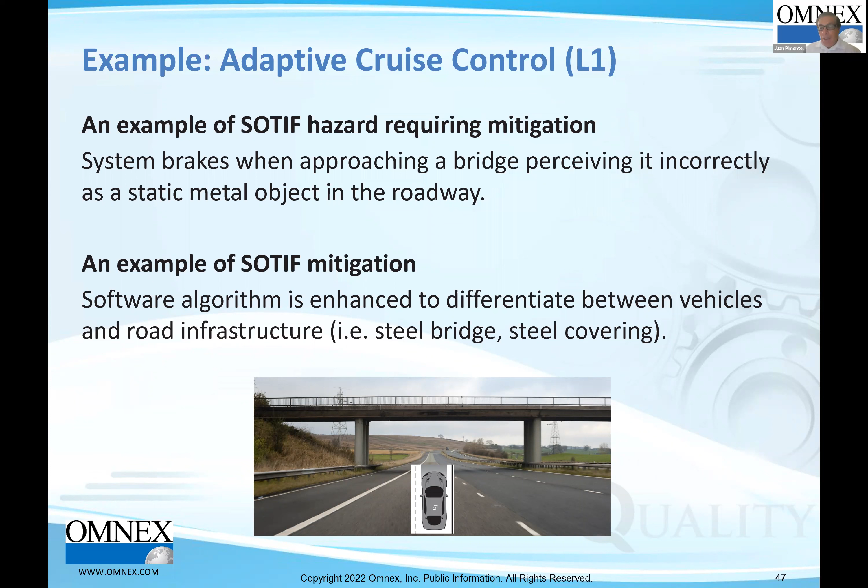So together, these are the 7 levers of the new, if you will, way of designing automated vehicles and electric vehicles. So this is for new designs that Omnex suggests that all companies pay attention to, some more than others, depending upon what type of supply chain company you are classified as. Could be OEM, tier 1 and tier 2 companies.

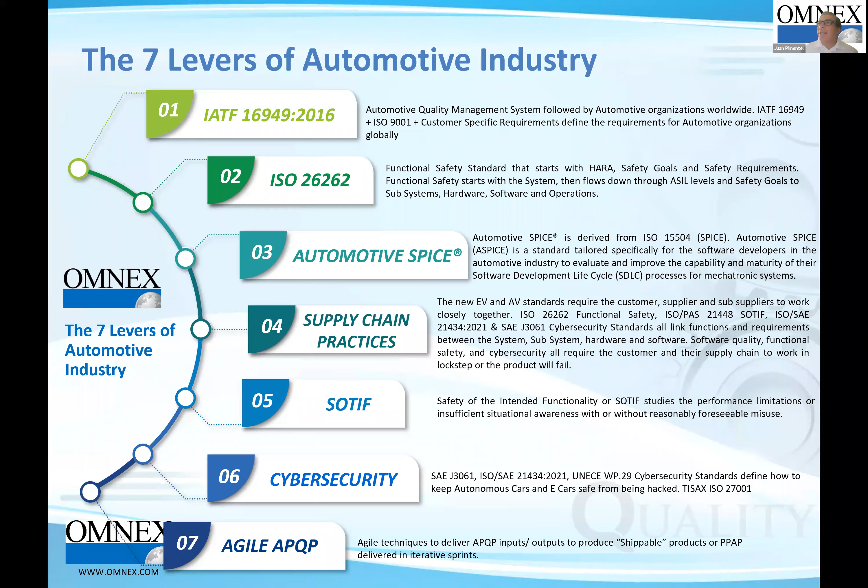So with that, I'm going to proceed to the summary of my seminar, of the main things that we covered. This new standard, which was released in April of this year, complements 26262, as I mentioned before, functional safety. This new standard addresses the so-called safety of the intended functionality, meaning the absence of unreasonable risk resulting from hazardous behavior related to functional insufficiencies, like performance limitations. That performance limitation I mentioned in the example is that the car could confuse the bridge with another vehicle. That's called a functional insufficiency.

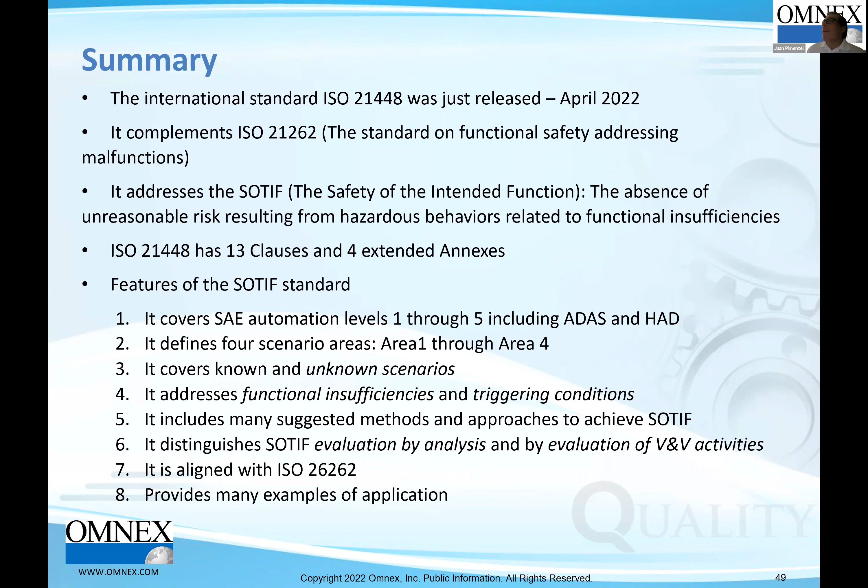It distinguishes between 2 types of evaluations, one by analysis and one by V&V, verification and validation. So the analysis is on the left side of the V model and the V&V is on the right side of the V model of systems engineering. It is aligned with 26262, and it does provide many examples of application, particularly in the annexes. Okay, so with that, that's the end of my